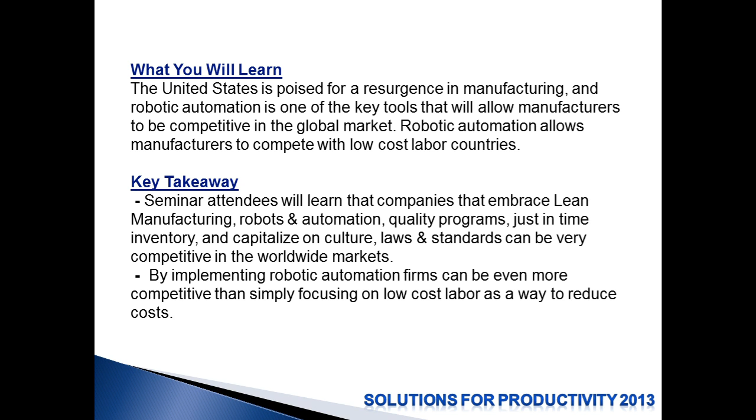So really what you're going to see today, what we're going to talk about is how North America is probably in the best position to have a resurgence in manufacturing. We've actually seen it over the last couple of years, and what you're going to see is that North America is in a great position for that in the future.

And the old paradigm used to be, if you wanted to be successful, if you wanted to reduce costs, you went offshore. You went to China, you went to India. In fact, a number of years ago, we were at the ATX show down in Anaheim, California, and we were doing a presentation on automated palletizing and packaging.

And in our room, unfortunately, it was crickets. There was nobody there. And in the next room, everybody was in there, for how to offshore, how to go to China effectively. But I think what you're seeing now is people coming back.

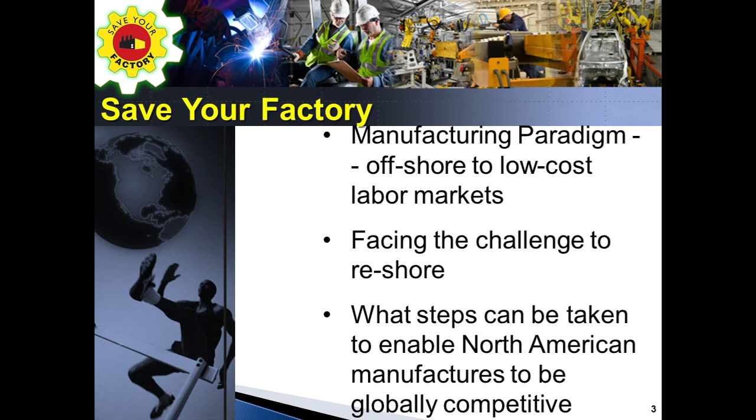So what steps can be taken to be competitive globally in North America? When you look at it, North America is still the largest exporter of manufactured goods. And manufactured goods still account for over 60% of all goods that the United States exports.

And when you think about it from an economy standpoint, it's $1.35 trillion in 2012, which is actually an increase from the previous year. So again, manufacturing exporting is continuing to grow.

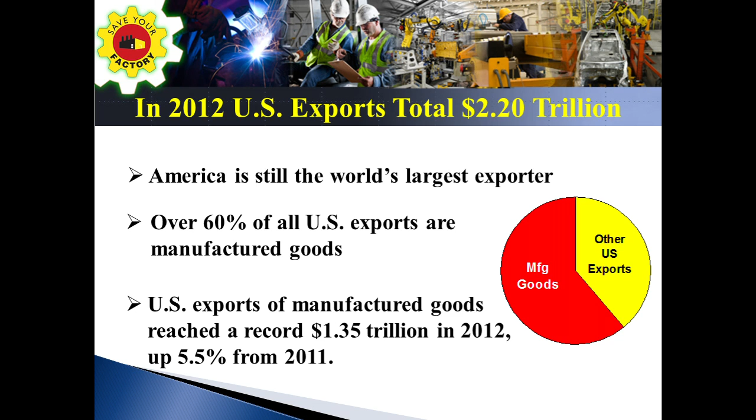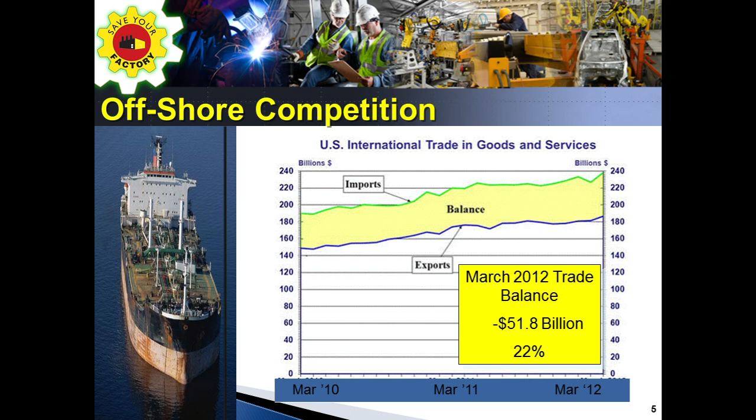But the challenge is going to be in the future, because one of the challenges we face is we have a growing trade deficit with China and with other countries. As you can see, by March 2012, the trade balance was negative 51, almost $52 billion.

In 2000, U.S. exports were 3 times those of the Chinese. In 2015, right now, the Chinese are on track to double U.S. exports. So manufacturers in North America face a real challenge.

And one of the things that obviously the Chinese are doing is maintaining and devaluing their currency so it keeps their costs down. But as that changes, that advantage is going to go away.

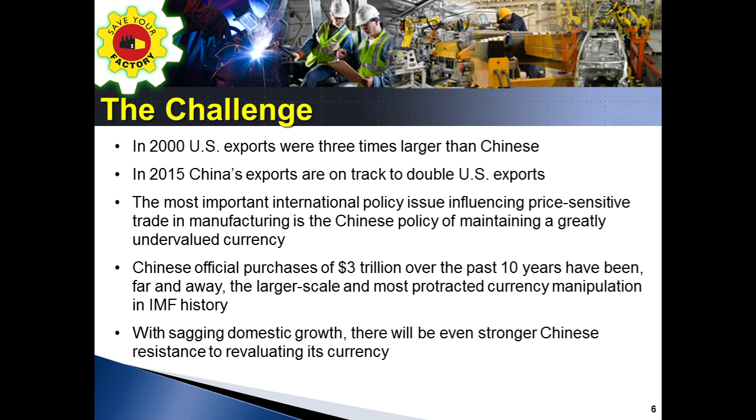But the importance of manufacturing in North America is it really leads GDP growth and productivity. If you look at some of the resurgence in our growth in GDP recently, it's all been manufacturing. Manufacturing is what leads innovation.

70% of the R&D is in the private sector, or 70% come from the private sector, resulting in 90% of the patents. And when you look at it, since 2010, we've created almost 500,000 jobs in North America in manufacturing.

And those are great paying jobs. Those are the kind of jobs that you want to have because they pay great, and you can see 17% higher than your standard service-related jobs. And they're really the backbone of the defense and industrial complex. You know, manufacturing, the ability to manufacture products, that's what won World War II.

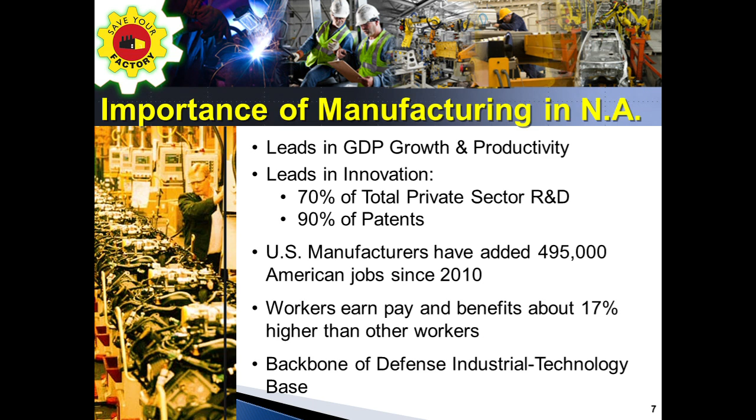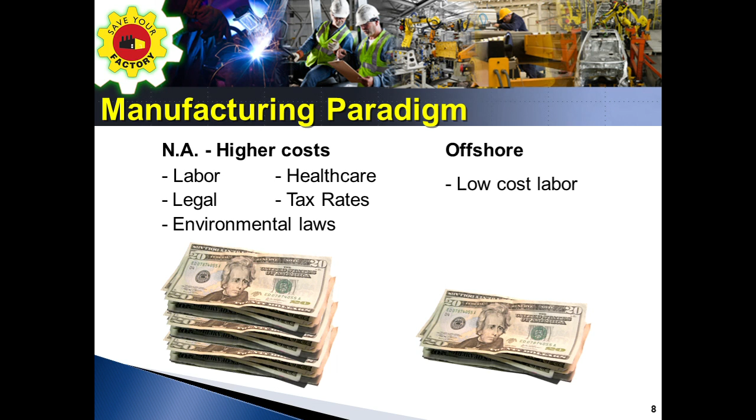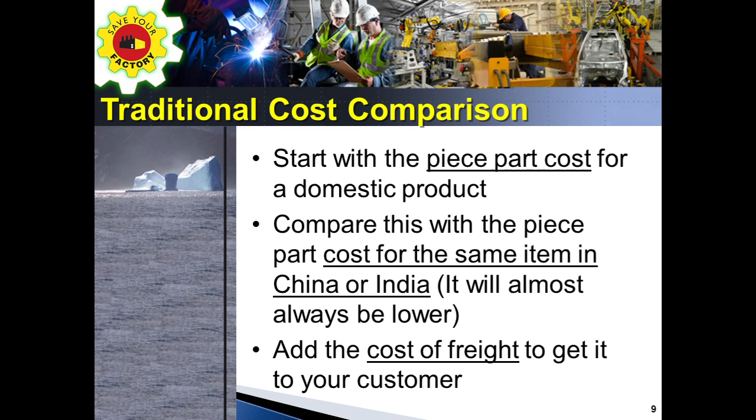That's what's been successful for the United States for a number of years. The old manufacturing paradigm was the problem with North America was we had high labor costs, high healthcare costs, high legal costs, regulations, tax rates, environmental laws. So it was cheap to go offshore to China or India, get low-cost labor, add in the cost of that piece part, add in the cost of freight, and it would typically be lower cost than doing it here in North America.

But what you really see is there's some other things that have to be evaluated as part of that cost comparison. Those things include shipping. Shipping has become more expensive with gas and oil prices increasing, and that shipping cost is continuing to increase.

Inventory - when you purchase from China or India, you typically have to carry a significant inventory. Insurance, obviously if your goods or services are damaged. Quality - we've seen a lot of issues coming out of China and India with quality, like the issue with the dog food, the issue with the paints, the issue with the drywall. Travel - you have to go to India or China on a regular basis to check on your goods or services. And then infrastructure risk, materials, labor.

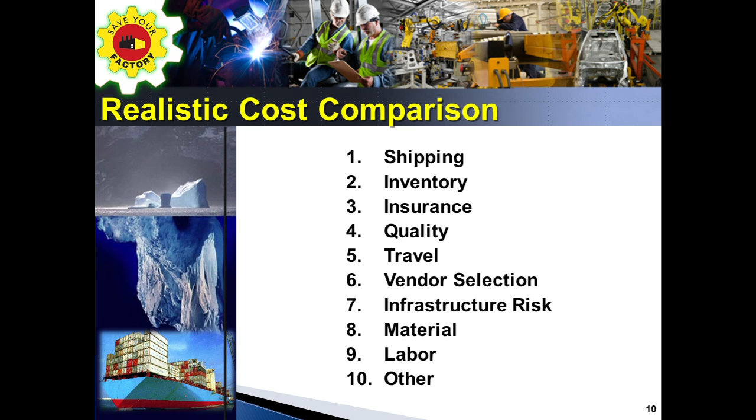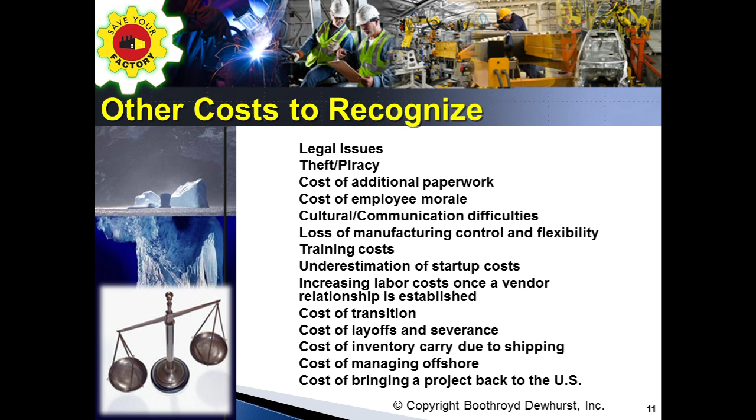There's just a lot of things people have to take into account going into manufacturing in a low-cost country, that when you really roll that in, North America is still a very effective place to manufacture. Some other things people have to think about are legal issues, theft and piracy - if you make something in China, there's a good chance your intellectual property will get stolen. Training costs, cost of transition - a number of things that need to be factored into whether it's really truly lower cost making something in China or another low-cost country versus doing it here in North America.

The reality is when you add all this up, North America versus doing it offshore are pretty close to being very competitive. What you're going to see next is how do we close the rest of that gap? We think it's through robotics, automation, lean manufacturing principles, just-in-time inventory. Those things close the rest of that gap to take away the cost differential with China.

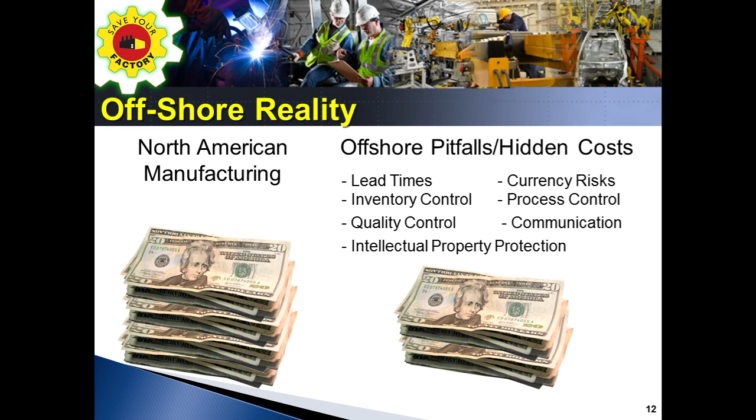So when you look at that, from lean manufacturing principles, robotics and automation, we have a number of companies here in California, North America, that are very competitive, actually have lower costs with automation in California and elsewhere within North America versus doing it in some low-cost country.

And at some point you kind of run out of low-cost countries to chase. Many manufacturers have gone to China, they've now gone to Vietnam - where do you go next? At some point you run out of stable political countries to go to.

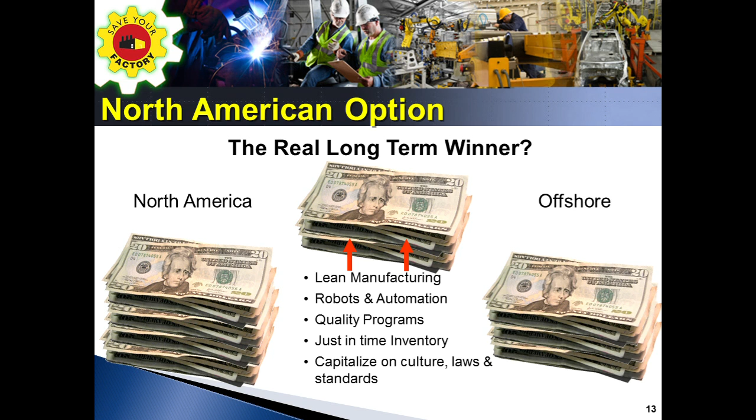Quality programs, just-in-time inventory - these are the real winners. So the people that really embrace lean manufacturing and robotics and other programs are going to be the ones that stay here, thrive, and prosper in North America. So again, embracing automation and using lean manufacturing.

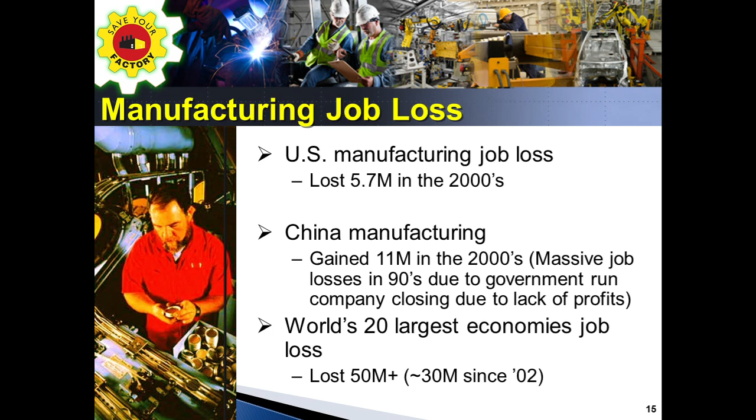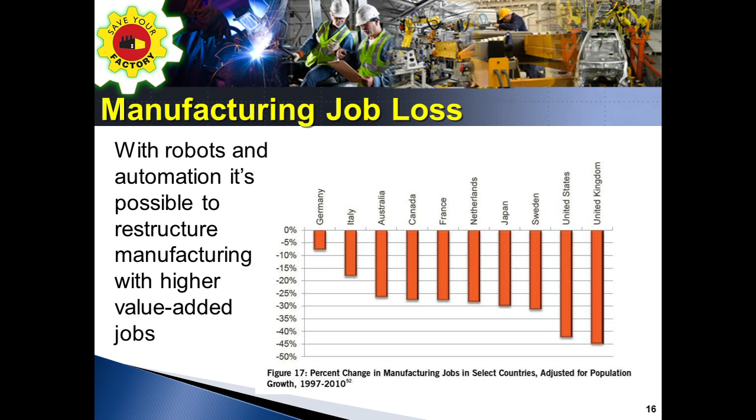Over the last number of years, the 20 world's largest economies have lost over 50 million jobs, really because of automation and other contributing factors. What automation allows you to do is restructure your manufacturing with higher value-added jobs. The jobs that are created are the folks that take care of robots, program and diagnose issues with automation systems. Companies like Germany, Italy, and Australia are highly automated countries. In Germany, for example, they have a number of automation systems, and they have just as restrictive labor laws.

One of the other issues North American manufacturers face - I've been working for Fanuc, doing this for about 30 years - by 2020 I'll have retired. I'll be one of those 70 million baby boomers that will have retired, and there's only going to be 40 million people entering the workplace. So that's a gap of about 30 million workers. Where do you find those trained employees? One of the issues is we just can't find enough technical people. Today, if you have some technical background, you can be in the automation business because there are a lot of positions available. Industry is begging for people with technical backgrounds. Right now only about 15 million are employed in manufacturing, but that's going to continue to grow over time.

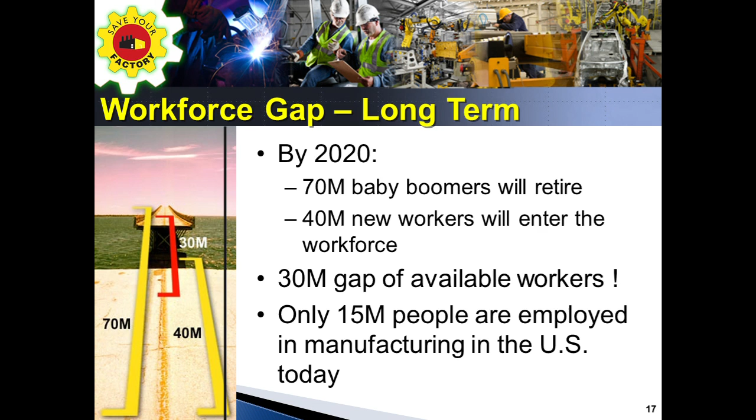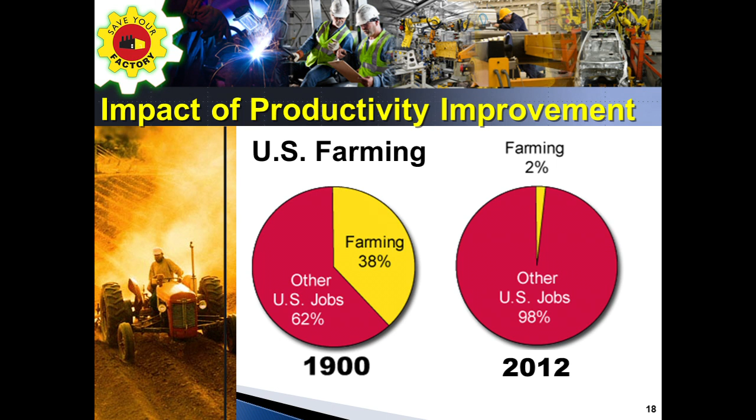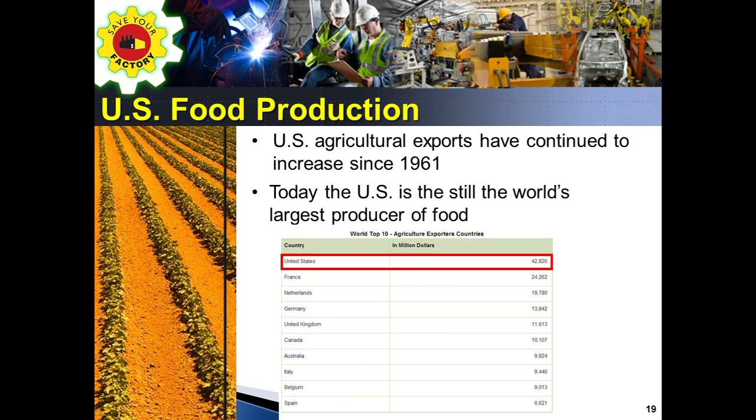When you look at the evolution of manufacturing automation, you can equate it to another adage: farming. At the turn of the century, almost 38% of Americans were involved in farming - every 4 in 10 people. Today, less than 2% of all Americans are involved in farming, but the United States leads the world in agricultural output and agricultural exports by a factor of 2 versus France and other countries. Why? Because of automation and improved farming techniques. Today's farms are highly automated. For example, one of the things we do is work with companies to automate the milking process. We have robotic systems milking cows on large farms in California, Texas, Wisconsin, and elsewhere in the United States.

So those kinds of things are really helping lead the production of food through automation techniques. Another example of where automation really helps increase output and save the factory is the steel industry. The steel industry has lost almost 300,000 jobs, but its output has increased almost 30% versus what they used to do. Through automation, through mini mills, through improved manufacturing techniques, they've been able to not only thrive but increase their output and continue to grow in North America. So really, technology was the key to the steel industry, and it was key to the growth in farming - that's what feeds the world, the American farmer and the technology he brings to it.

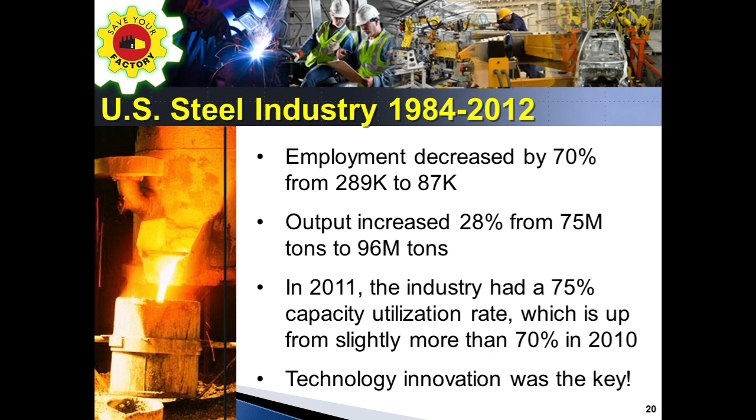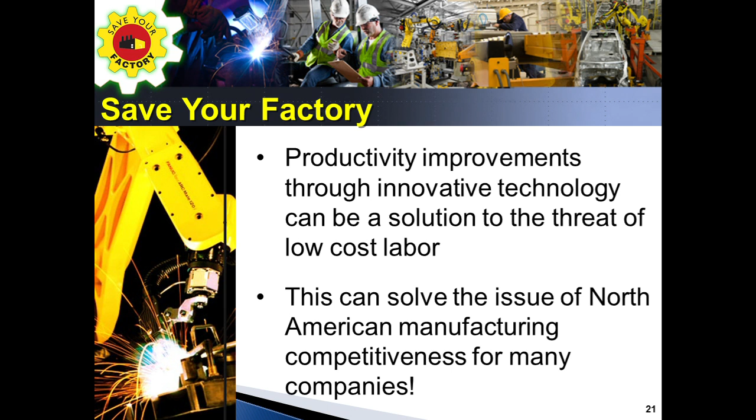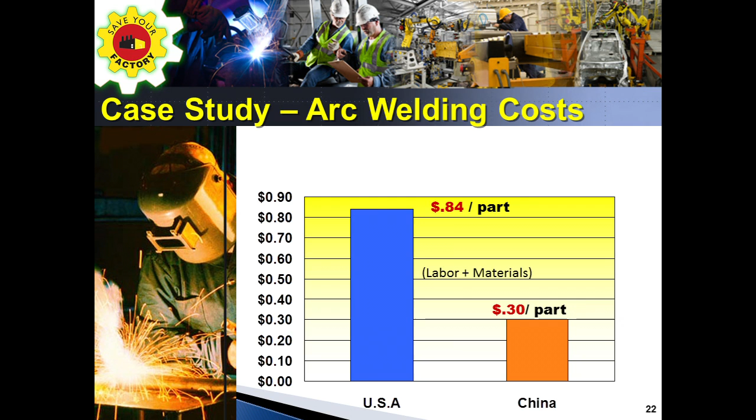When we look at productivity improvements through innovation and technology, these are really going to help North America solve its competitiveness issue. Let's take some examples - why robots, why automation? This is a real company in Ohio manufacturing an automotive component. This component was costing them 84 cents to weld and make. They could buy the same thing in China, but this company made the decision they wanted to be in the United States, wanted to continue to manufacture, didn't want to go to China, wanted to keep making the product here. By implementing robotics and improved manufacturing processes, they were able to get their cost down to 30 cents, the same cost as China - but now China's more expensive because you still have to pay for shipping, duty, and other things. So by implementing robotic automation, they were able to lower their cost, be more effective, and deliver faster to their customers.

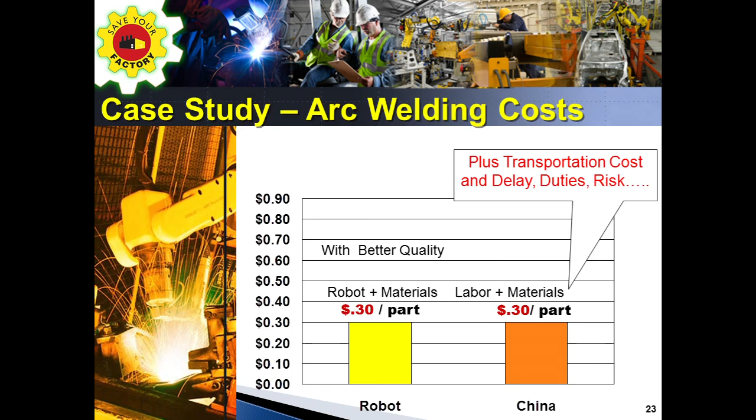Another example: machine tool load/unload. There's a number of robots used for loading and unloading machine tools, injection molding machines, etc. This company, located in Colorado, was costing them 97 cents to make their parts.

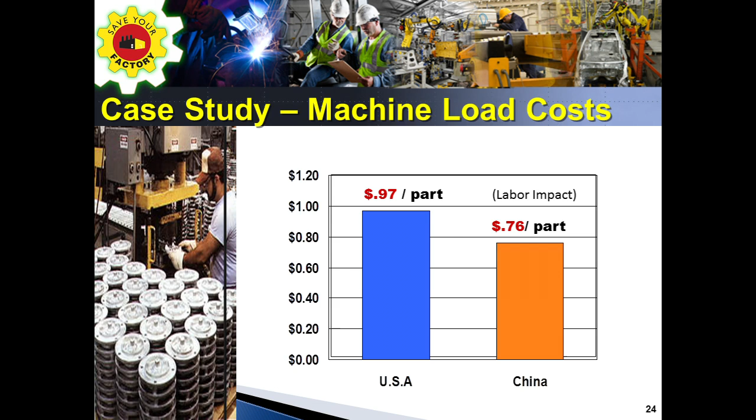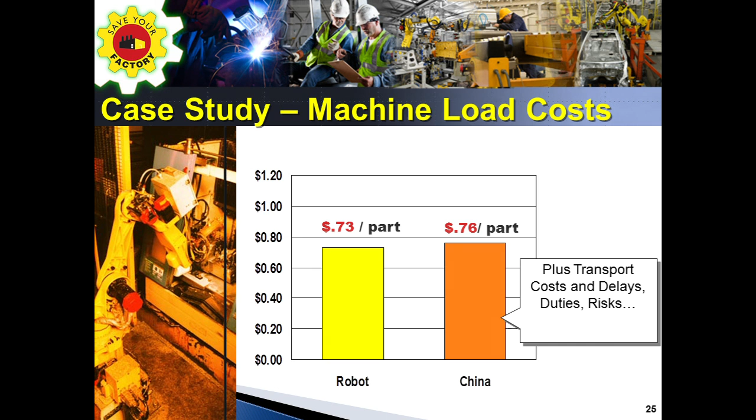They could do the same thing in China for 76 cents. So what they did is implement robotic automation, and they were able to lower their cost down to 73 cents a part. So they were actually cheaper than making it in China, plus they had the advantage of not having to pay shipping, duty, freight, and all those other risks associated with making it in China. Why? Because they went to automation.

The real reason is because they were able to get higher spindle utilization. A machine tool is only going to turn metal and cut chips so fast - you can't do it faster whether you're in the United States or China, it's all kind of the same. But by implementing robotic automation, they were able to increase their spindle utilization so that spindle went from 79% efficiency up to 95% efficiency. So through robotic automation, they're able to reduce their costs and be competitive and stay here in North America.

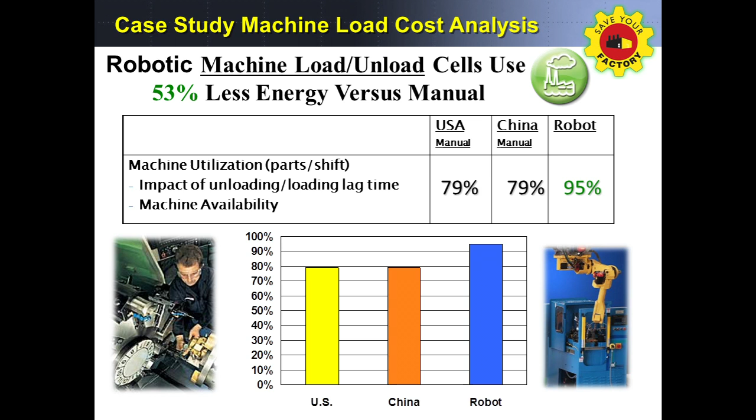The other thing, and really one of the advantages, is they're able to do it with 53% less energy. So one of the factors you're starting to see with robotic automation is it saves you energy and helps reduce your cost. So not only is it a labor savings, it also helps reduce your energy cost as well.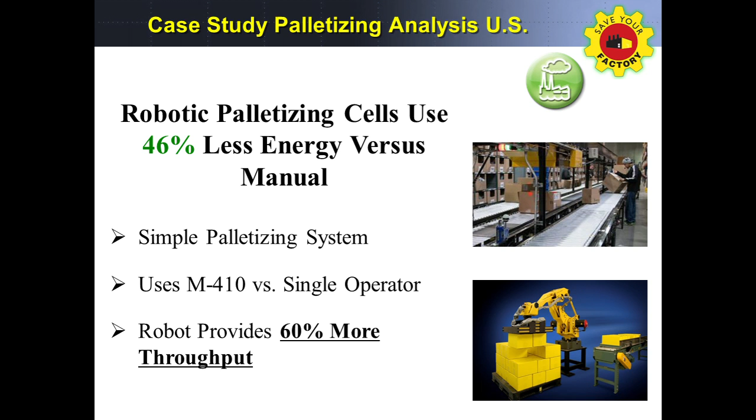Another example, in palletizing - you'll see if you go down on the floor, robotic palletizing. A simple robotic palletizing system is going to provide 60% more output, which saves energy and provides greater throughput versus having somebody hand palletize or hand stack. Then you think about the ergonomic issues and other costs associated with manual palletizing - it just doesn't add up. Robotics saves you more money and it's more energy efficient than manual labor.

Here's another example of an assembly application. This is part of your transmission housing, where you're putting the insert, putting these blades into it. You can see down the lower right-hand side somebody manually doing this. This was automated, and this reduced the energy cost 80%, improved the efficiency, and this is being made back in Michigan again versus being made in China.

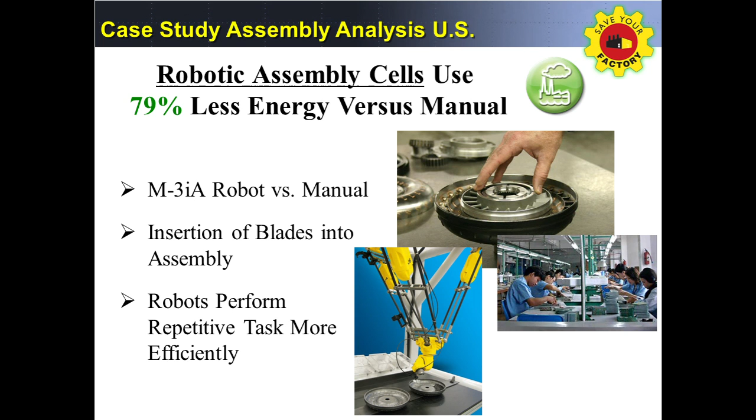So there's a lot of advantages to robotic automation in manufacturing here in North America that we have to offer. One of the interesting facts is in the United States, we've got a lot of room to grow.

For example, in Japan, there's one robot in manufacturing for every 32 employees. In Europe, it's about one for every 40-ish. In the United States, there's one robot implemented for every 86 employees. So you can see there's a lot of opportunities to improve manufacturing.

Fanuc, the company I work for, for example - our factories have 10 robots for every employee, or more, out on the manufacturing floor. And that percentage is increasing every year. So you can see we're doing it very efficiently. This is actually what you see on the lower left-hand side, a picture of robots making robots. So George Orwell was right - it is going to come to that at some point.

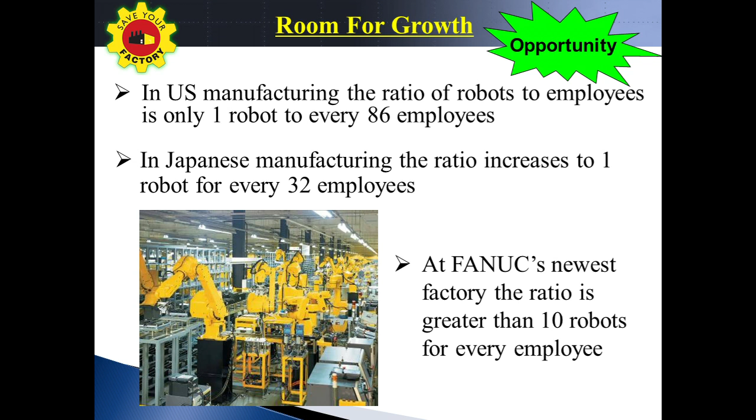One of the benefits of robotic automation is it helps you address the attrition of skilled labor - finding skilled assemblers, finding skilled welders. This can be done with a robot. It doesn't require health care or pension costs. You can't pick up the paper, you can't watch TV, without seeing that health care costs are going up, or look at your paycheck and see that your deductible or whatever else is increasing constantly.

Manufacturers are feeling the pain of increased health care costs. You need consistent quality to be competitive, and obviously automation reduces scrap. It's available 24/7, 365.

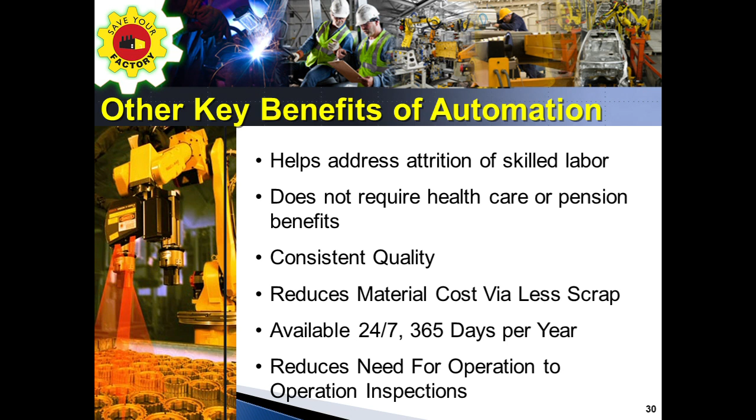As we talked about earlier, there's going to be a skilled labor shortage—there already is one. If you talk to many manufacturers, they're looking for skilled people. In 2011, 600,000 jobs remained unfilled. We hear a lot about unemployment, but there's almost 600,000 jobs out there for people, but they've got to have skill. You've got to have the skill to be able to do those kinds of jobs. That's where the future is.

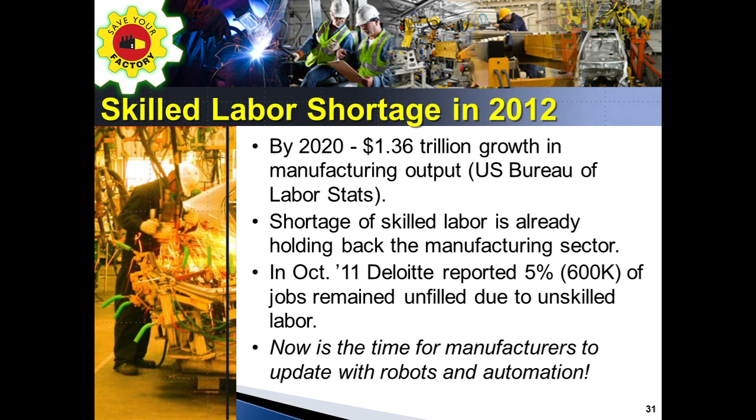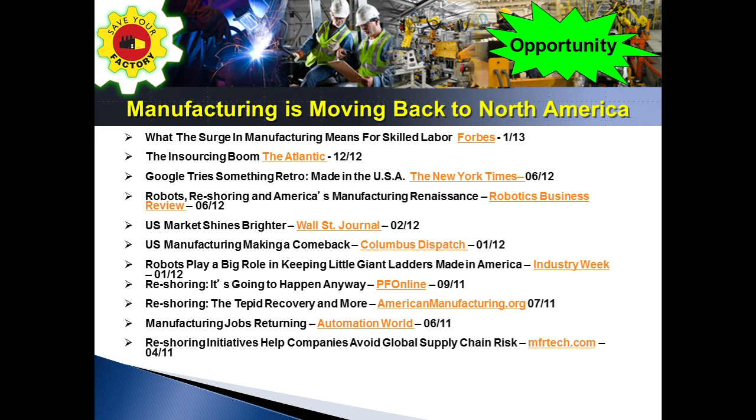When you look at it, you can see there are several articles. A lot of publications have been discussing robotic automation and reshoring—who's coming home. Auto manufacturers, electronics companies. You've all heard Apple is going to start manufacturing here in the United States. Google is making Google Glass, and they've decided they're going to make that in Santa Clara, California.

When you look at automakers, I was just at the Tesla plant in Fremont, California, on Tuesday. Last month they made $12 million and they're going to repay their federal government loan early. So they're being successful. That success is due to automation, and doing that automation here in the United States.

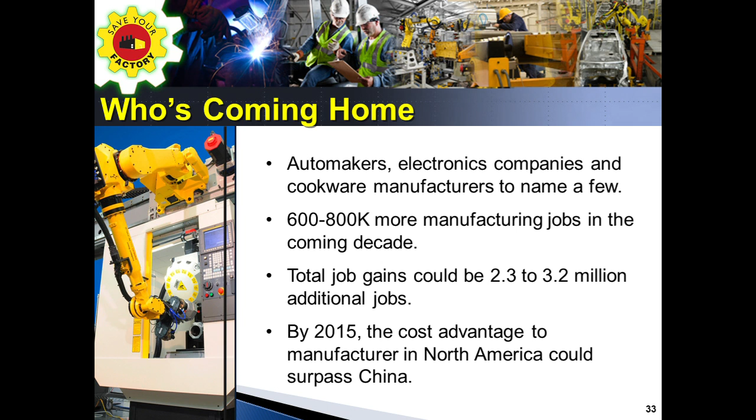Again, we see almost 1 million manufacturing jobs being created in the next decade, and the total gain could be somewhere between 2 and 3 million. The cost advantage is going to go to North American manufacturers, because one of the reasons is we've got an abundant supply of energy here. If energy costs continue to go down, we could be even more successful.

This is a company in Springville, Utah, called Little Giant Ladders. You've probably seen the infomercials or seen them at Home Depot or Lowe's. One of the things they do is completely robotically weld their ladders—it's just a simple aluminum structure. And they do it in Utah. They've been able to increase their production, they have skilled labor, and they've been able to reduce their costs. They love manufacturing in North America, because a lot of people want to be here. They don't want to go overseas—they want to make stuff here.

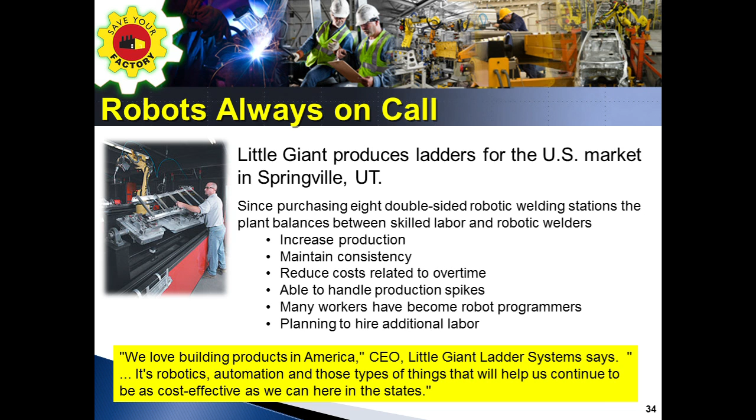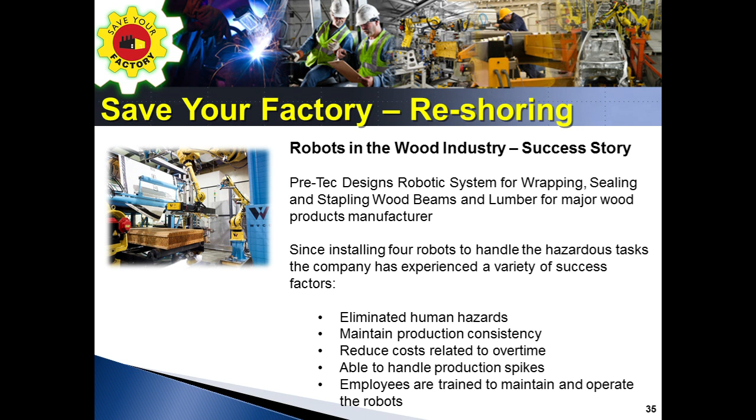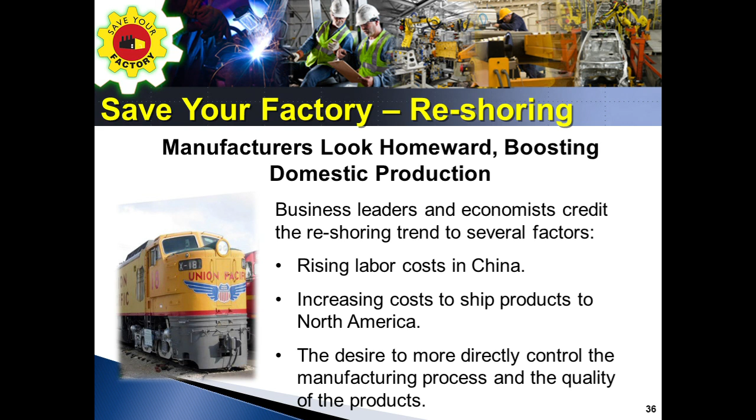Other companies are coming back—GE just announced a new locomotive plant in Texas. People are coming back because of rising labor costs in China. We do a lot of work with a company called Nike. They've just recently started to move from China down to Vietnam, and now they're looking at what they do next to be successful—facing increasing shipping costs and a desire to control manufacturing more tightly by having it here in North America.

The thing about Save Your Factory is saving U.S. manufacturing, which we think is critical to the long-term success of the economy. Manufacturing has a very positive effect. Contrary to what everybody says about the service economy, manufacturing has the good paying jobs, working on robots and automated systems versus selling fries. It has a very positive impact on the U.S. economy and on the environment. Manufacturing is going to go to those companies that embrace automation, embrace lean manufacturing, and reduce their production costs. We really think North American manufacturing and ingenuity is going to lead the way. We've done it before, and we can do it again.

So with that, I'll show you a little bit of video.

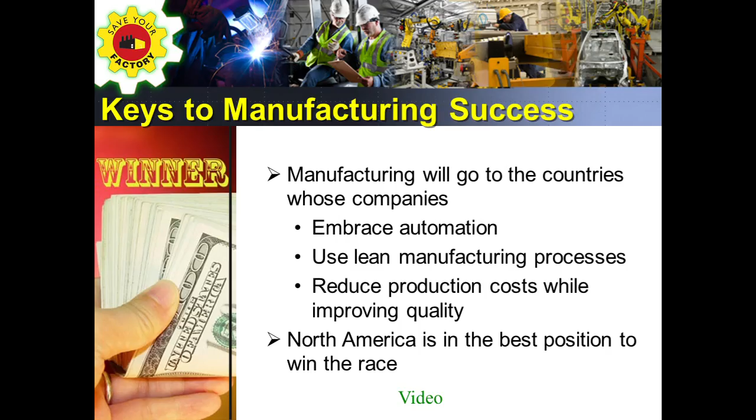What we're seeing is a fundamental shift in economics. Even some jobs moved overseas are now heading home. Manufacturing has been a bright spot in the economic recovery, with more than 450,000 factory jobs created over the past two years. A survey from Boston Consulting showed that 48% of manufacturing companies with annual sales above $10 billion have reshored. General Electric, Caterpillar, and Masterlock are all bringing jobs back.

China was a great place to go in 2001 when wages were only 58 cents an hour. Wage rates are going up much faster than productivity and inflation. As wages in low-cost factory centers rise, the cost-benefit of outsourcing is fading fast. In addition to the rising Chinese wages, rising energy costs make shipping from China very expensive. Increases in diesel fuel prices are making it prohibitively expensive to ship goods from China to the U.S. As the cost of energy has come up, the cost of transporting those products has come up too.

Cheap energy, natural gas in particular. The price of natural gas in this country is much cheaper than virtually any place in the world, and manufacturing requires natural gas. The cost of natural gas is going to be considerably lower in North America than in any other industrialized country, and that's going to be a big advantage to North American manufacturing relative to anywhere else. Productivity in the United States has risen dramatically.